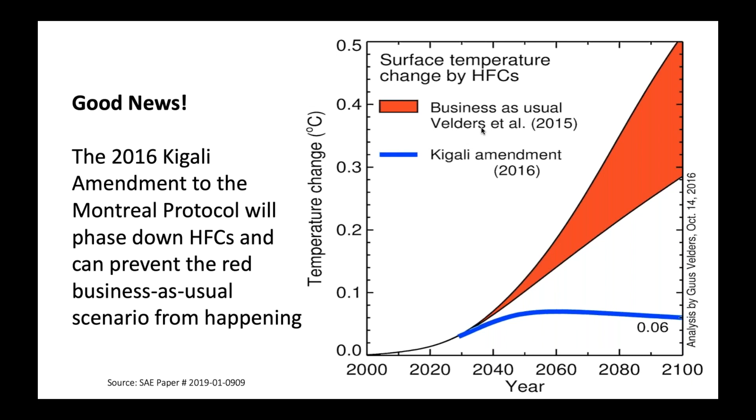So now you see the Velders base slide showing how the phase down of HFCs will reduce potential climate change by 2100.

Yes. Okay. Okay. So can I move on to this slide?

The next slide is okay. The next slide is the not so good news: low GWP MAC refrigerants are used in only a fraction of vehicles sold globally, the low GWP MAC refrigerants being primarily HFO1234YF or carbon dioxide. The solutions are needed for growing and emerging markets, especially in Asia and particularly in China and India, where the population is growing rapidly and standards of living are increasing rapidly.

So this chart shows that since 2013, there's a total of about 500 million vehicles on the road with mobile air conditioning using HFO 1234YF. Excuse me. Over 500 million vehicles on the road, period, with mobile AC since HFO 1234YF was introduced. The amount of cars using HFO 1234YF is only 65 to 85 million, according to Chemours, one of the major suppliers. So many of the cars on the road are still using HFC 134A.

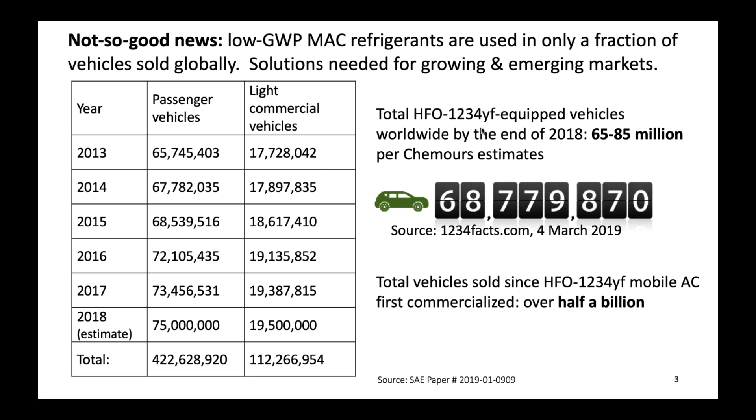So what is a secondary loop MAC system? The image on the left, is everybody seeing this slide with the image of the two systems? Yes, we are. Yes, okay. The image on the left is the direct expansion system, which is used in most mobile air conditioners right now. And the image on the right is the secondary loop system. And you can see that the image on the right has a piping loop in green, and that's where the refrigerant would go.

In the direct expansion system on the left, the refrigerant moves throughout those purple tubes, which means that they actually enter the passenger compartment. In the secondary loop system, the purple tubes carry coolant, which is non-flammable and can enter the passenger compartment without any risk to the passengers. So it also means that really any refrigerant can be used in a secondary loop system because the refrigerant stays only in the engine compartment. The secondary loop system also uses fewer fittings and shorter refrigerant hoses, so there's less chance of emissions of refrigerant.

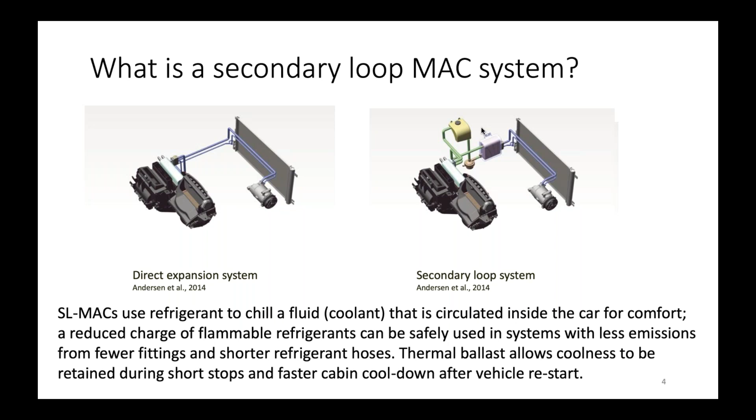One of the key features about the secondary loop system is that you can see there's a purple tank in the image on the right, and that holds the coolant. And that's called thermal ballast because it retains coolness even when a vehicle stops for a short period of time. So for example, if someone is making deliveries or stopping for a quick errand, when they get back into the vehicle, it will cool down much faster than in a direct expansion system. Or if you have a stop-start vehicle, it will save fuel because the car won't have to turn on while the vehicle is stopped in order to run the compressor to keep the vehicle cool. So it's an efficiency savings and a fuel emission savings.

Our demonstration used a Tata Aria 2.2 liter Dicor vehicle. It's a small utility vehicle that's shown on the right. And our goal was to show that the SL-MAC system can reduce refrigerant emissions and maximize energy efficiency by using improved powertrain control logic. And the powertrain control logic is just the software that allows the powertrain and the air conditioning system to communicate. So it tells the air conditioning system when to turn on, when the compressor should turn on. So for example, the compressor can turn off when the vehicle is accelerating or going up a hill, which saves energy, and then it can turn back on to cool down the vehicle when the car is slowing down or going down a hill.

So by maximizing that powertrain control logic, we get what's called enhanced air conditioning, and it takes maximum advantage of the motion of the vehicle to minimize fuel emissions and increase energy efficiency. Our partners, as has been said, are MAHLE, Tata Motors Limited, and IGSD, and dozens of collaborators and advisors. The refrigerants tested were HFC152A with a global warming potential of 138, and HFO1234YF with a global warming potential less than 1 in an SL-MAC system versus HFC134A with a global warming potential of 1300 and HFO1234YF in a direct expansion system. And of course, we are very, very grateful, as said before, for funding from the CCAC.

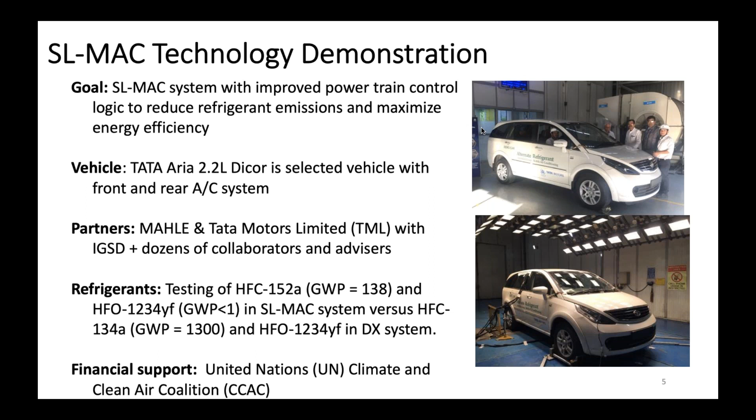Okay, so this slide shows our core SLMAC demonstration team and advisors. Most of these were directly involved in the project. From TML, the lead was Sangeet Kapoor with Prasanna Nagarhali, and Jagbendra Meena was the lead engineer. From MAHLE, Timothy Craig was the lead, and Lindsay Lietzel and Dr. Saurav Chaudhuri were the engineers. Jim Baker was our consultant, and IGSD, we were led by Dr. Stephen Anderson and Melinda Soffer, and I participated with Kristen Taddonio.

We also have this long list of advisors from Ford, GM, California Air Resources Board, universities, NRDC, a wide list of advisors and experts to help guide us along the way. And it wasn't just building the vehicle, it was also developing new standards with the Society of Automotive Engineers, doing a risk assessment update, doing a life cycle climate performance analysis, and just a very, very broad, comprehensive project.

So why are secondary loop MAC systems needed? As most of you know, HFC-134a is being phased out because of the Kigali Amendment. 1234yf is expensive, it's covered by patents. It risks recharge substitution with HFC-134a because of the high cost.

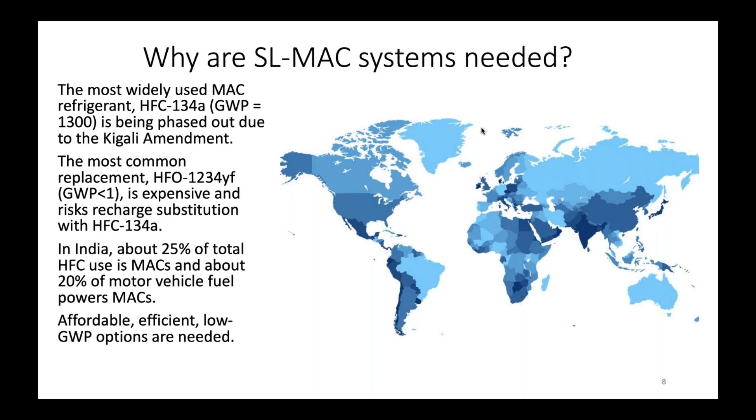And in India, where our project was based, about 25% of total HFC use is with MAC, and about 20% of the motor vehicle fuel used powers MAC. So HFCs are a very substantial factor in climate in India, and affordable, efficient, low GWP options are needed.

So why not direct expansion with a low GWP refrigerant? Direct expansion limits your refrigerant choice. It has to be 134a, 1234yf, or carbon dioxide. 134a is being phased down, 1234yf is expensive, and CO2, which many are interested in, has very expensive components, has performance concerns at high ambient temperatures. So it's used in very, very limited areas right now, in very limited markets.

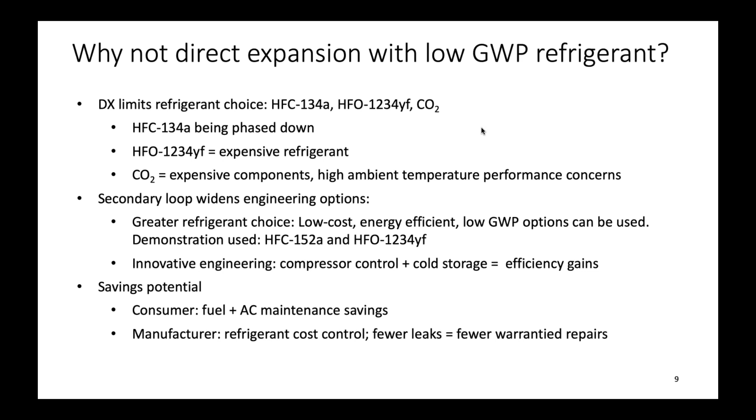Secondary loop widens the engineering options, many more and several more choices. We understand hydrocarbons are possibly being tested in secondary loop systems in the international market. And it allows for innovative engineering to maximize energy efficiency through use of the powertrain control system. And there's also savings potential for the consumer with fuel and air conditioning maintenance savings, and the manufacturer savings through refrigerant cost control, fewer leaks, fewer repairs under warranty.

So a secondary loop system provides advantages with an R134a system, 1234yf, or 152a. All of these, you have fewer fittings and shorter hoses for lower leak rates, higher reliability and lower service cost. You have this capacity for cold storage and a quicker cool down after a quick stop, a smaller refrigerant charge. You have manufacturing savings versus a direct expansion 1234yf system in a car with two cooling points, front and back. There's less air conditioning system noise and vibration because of the shorter hoses and the fewer connections.

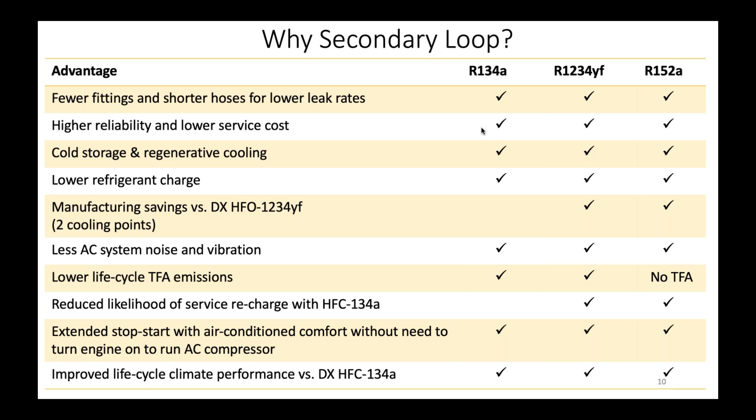There's lower life cycle TFA emissions, that's trifluoroacetic acid. It occurs in the environment, very small emissions with 1234yf, but 152a has no TFA emissions. There's a reduced likelihood of service recharge with 134a, extended stop-start, and improved life cycle climate performance versus direct expansion 134a systems.

We included 152a in the test because it's more affordable, it works at a lower pressure, so it has higher efficiency at high ambient temperature. There's more than a 95% reduction in direct refrigerant emissions impact due to the reduced charge and lower GWP, has good life cycle climate performance, no TFA, and importantly, it satisfies the US EPA Significant New Alternatives Policy, or SNAP, and the EU F-gas Directive, which requires the GWP less than 150.

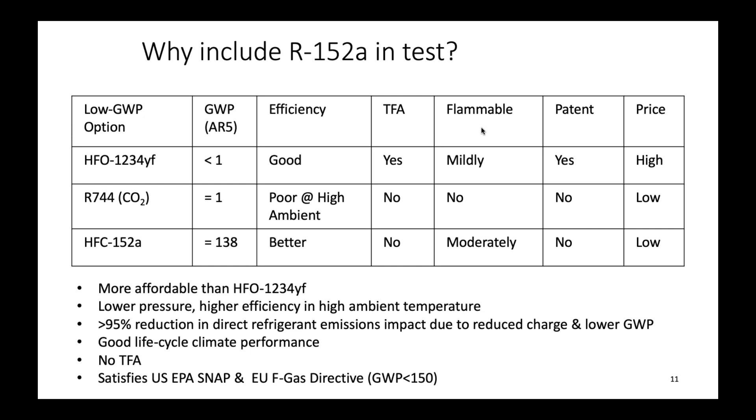So now I'll turn it over to Tim Craig and Dr. Chowdhury to talk about the system and some of the technical aspects of the secondary loop MAC program.

Okay, thank you, Nancy. Can you hear me all right? I certainly can. Okay, good.

Well, this is Tim Craig, and I appreciate the opportunity to give an update to those on the line relative to the technical aspects of this project. I'll give a quick introduction, and then Saurabh Chowdhury, who is the principal investigator, will go through the technical details. So first, in addition, let me thank the other members of the project, certainly IGSD and also CCAC for funding this activity.

I wanted to give a bit of perspective on this system relative to the applicability of secondary loop technology in the automotive environment. Because we are a supplier, we work very closely with the OEMs, and we look at various aspects of technology and the opportunity for an OEM to adopt that technology. In addition, secondary loop, when you look at it from multiple aspects that would be of a customer concern, it's applicable. First of all, if you think about complexity, although there are some additional components added, the relative level of complexity of a secondary loop is in what I would call the simple category relative to automotive technologies that can be implemented.

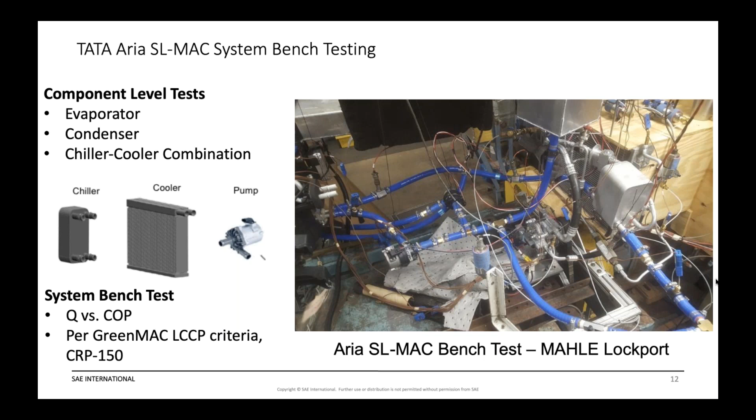Nancy, can you please move to the next slide, 13?

Okay, this shows the schematic of the test setup. The refrigeration system is shown on the top part of the sketch, which has a compressor which compresses the refrigerant and feeds into the condenser, which is shown by the orange rectangle. The condenser condenses the refrigerant, passes it to a TXV or an expansion valve, and that expands the refrigerant into a chiller. The chiller has another stream running through it, which is shown by the blue lines at the bottom part of the sketch.

That is the coolant loop. The coolant goes through the chiller. The refrigerant on the other side cools the coolant, and the cold coolant is fed to two coolers. There are two coolers because the system on the Aria has a front evaporator and a rear evaporator. The front evaporator is for the front driver and passenger climate control, and the rear evaporator is for the second and third row seats. So the coolant is fed to the coolers in those two locations. There is a reservoir which can accumulate the amount of coolant which is chilled by the chiller, and it can dispense it based on the requirement of the vehicle.

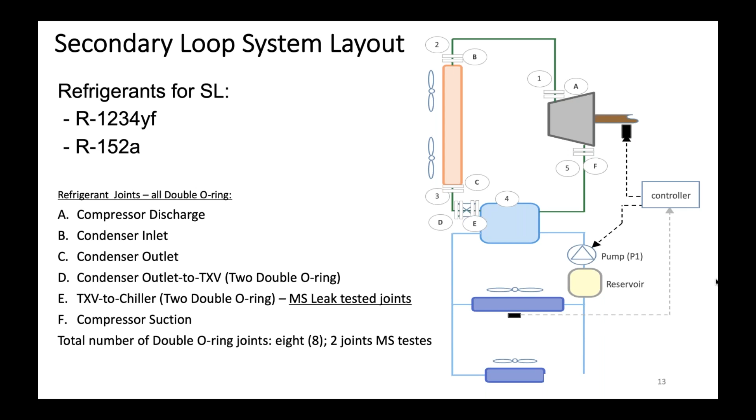Can we please have slide 14? In slide 14, we see the two comparisons. One on the right is according to the SAE J2727 standard. We have done calculations to show the baseline Aria system, direct system, versus the SLMAC Aria system, what

the difference is in R134A emissions in grams of refrigerant per year of usage. We have done this calculation with the assumption that the compressor has a single lip seal versus a double lip seal. So on the left column, you have 1 and 2 showing those two variants. The baseline versus SLMAC shows significant reduction, up to I think between 40 to 50% approximately reduction in refrigerant. This is just pure calculation based.

On the left-hand side, the blue table shows the actual test which is conducted according to SAE J2763 standard. There are two types of tests, one is a static test and one is a dynamic test. The difference is, in the static test, the refrigerant system is put into a chamber and we measure the amount of refrigerant gradually being leaked from the system into the chamber without the system being turned on.

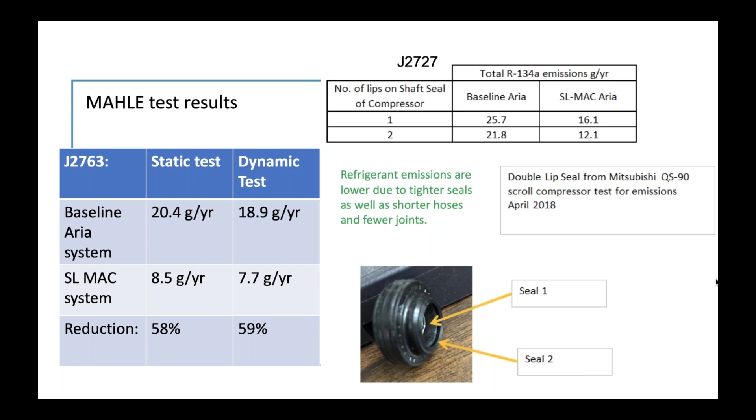So this chart summarizes the test results on the vehicle, which is performed first by MAHLE at our Lockport facility, and then the vehicle was transferred to Tata facility in Pune, India, and they performed these set of tests or measurements to assess how we are faring against the baseline vehicle. So of course we are using this low GWP refrigerant, which is one of the targets. By the way, the targets were set sometime in the early phase of the project after understanding the system behavior and the system requirements. Tata and MAHLE jointly set these targets

to ensure that the progress of the project is in the right direction. So we are, by using the 152A and 134A refrigerant, 1234yf refrigerants, we have met the GWP reduction target. In our system, because we have a very compact system, which is shown on the upper part of the sketch that I referred to a couple of slides before, we are reducing the amount of refrigerant significantly. The baseline vehicle came with 800 grams of 134A refrigerant, and we reduced the amount of refrigerant to approximately 430 grams, which is amounting to approximately 46%. Target of 40% is met.

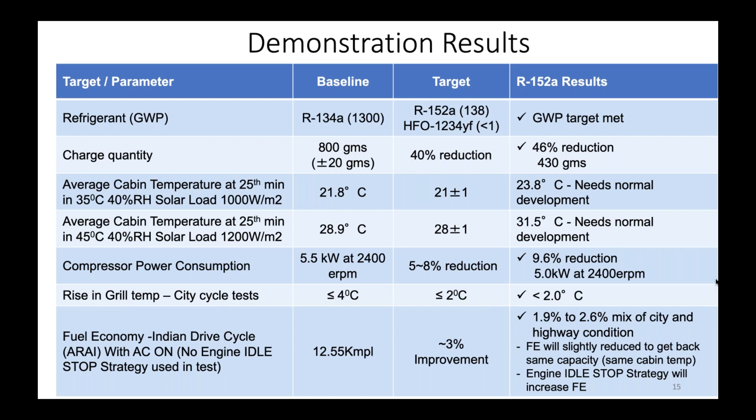So if you see the last bullet point in that lowest row, it says engine idle stop strategy will increase fuel economy. That is what we mean when we say that in a future vehicle, if we could implement this stopping of the engine during an idle condition or during a traffic stop, we would save even higher amount of energy. Nancy, kindly move to slide 16.

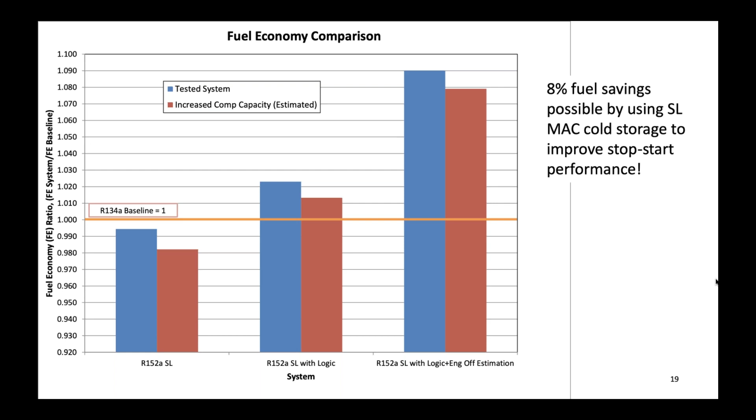In the next slide, we see the progression of how we get from our standard refrigerant 134A system, which we see right now in most vehicles, to a very low GHG emission. The first step shows if we enhance the current system, just improving, for example, the hoses and the joints and the compressor type, we get a significant benefit, 44%.

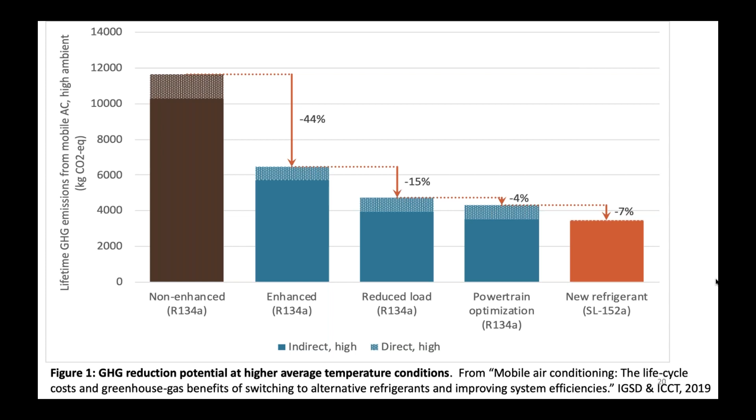Then, if we have this vehicle and improve it with proper insulation, proper kind of glass which reflects most of the heat, we will get an additional 15% benefit. Finally, if we implement start-stop logic, we get another 4% benefit approximately. And with the new refrigerant 152A introduced, which requires less power from the compressor, you get an additional 7%. So overall, we get approximately 70% benefit if we can walk through this process and implement it in all the vehicles.

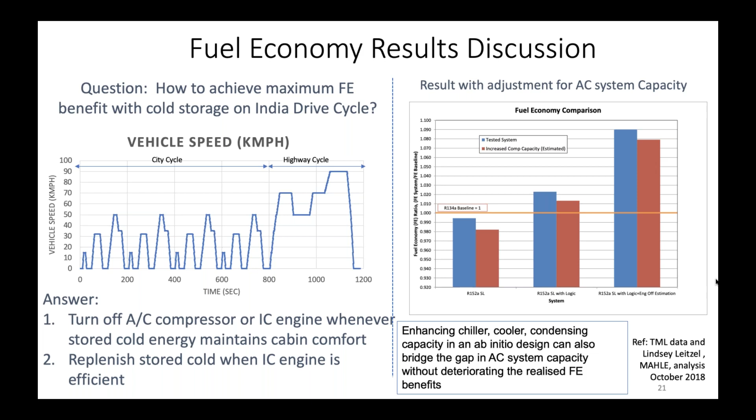This is a similar chart as discussed before. Here we show the Indian drive cycle. If you see, the first city phase has frequent stops and starts, and the vehicle speed is relatively low. In the highway cycle, we have high-speed driving. There are some decelerations and accelerations, but there is actually no stoppage of the vehicle in that phase. And we achieve the fuel economy, as I mentioned, with stopping the compressor as well as stopping the engine to conserve the fuel usage.

So this is overall what the project achieved. We reduced the amount of charge in the refrigerant system from about 800 to 430 grams, and we also improved the leakage by improving the joints and reducing the number of joints from about 37 to about 59%. And finally, as I mentioned, by walking through these different steps in technology improvement, we can reduce the total GHG emission by 95%.

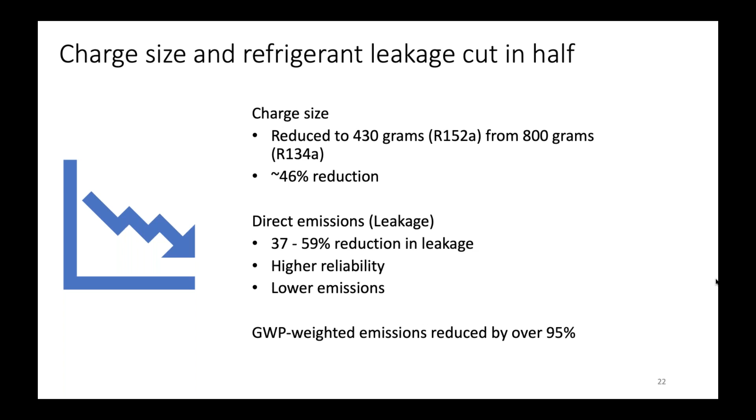Nancy, please take over this slide. Yes, so I'll take over, and the figures for these slides were produced and calculated by Kristen Taddonio, who I think is on the line. It shows the projected secondary loop manufacturing and ownership cost for India for a 2 cooling point system, cost and savings in US dollars.

So in terms of the refrigerant, the charge in a direct expansion system with 134A is 800 grams. With 1234YF, it's 750 grams. And for the secondary loop system, it's almost half at 430 grams. So the CO2 equivalent tons for the initial charge is 1.04 for 134A, but less than 0.01 for 1234YF and less than 0.1 for 152A.

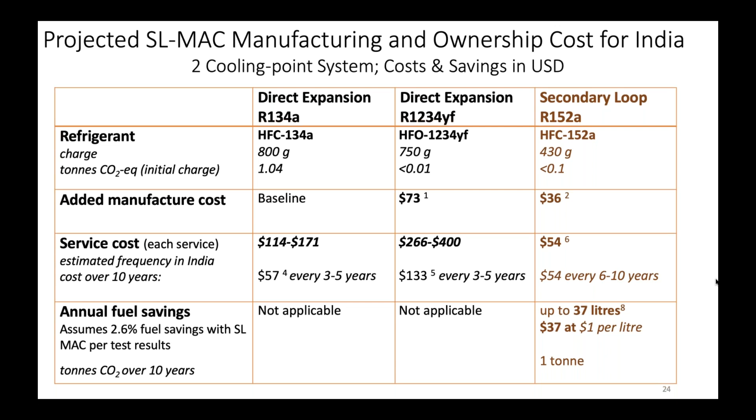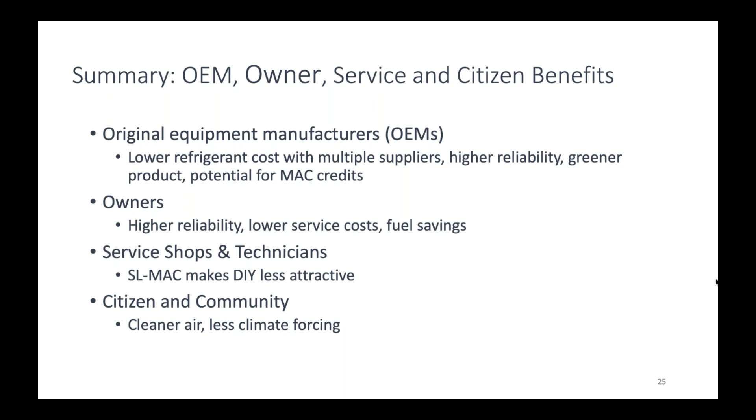So in summary, there are original equipment manufacturer savings, owner savings, service, and citizen benefits. For OEMs, there's a lower refrigerant cost with multiple suppliers, higher reliability, it's a more environmentally responsible product, and has potential for MAC credits. For owners, there's higher reliability, lower service costs, and fuel savings. Service shops and technicians have the advantage that the secondary loop system makes do-it-yourself servicing less attractive. And for the community, it's cleaner air and less climate forcing.

So in terms of communications, the project has been widely publicized since its beginning in July 2016. There have been 14 papers and presentations by members of the team since July 2016. Audiences have been Montreal Protocol meetings, industry, and public audiences. In addition to the IGSD reports, there have been milestone reports submitted by MAHLE and Tata Motors according to schedule, including their very, very substantial final reports.

11 meetings and side events have been conducted or attended to present the project progress and the results. And there's been coverage in more than 20 mainstream and industry media as a result of the press releases and papers, including Reuters, Economic Times, and Automotive Engineering Magazine. And this slide just gives a portion, not entirely complete, because they don't fit, of the presentations and papers that have been given on the project, including a 2019 presentation at the SAE, Society of Automotive Engineers World Congress, just this past spring by Kristen and Tim.

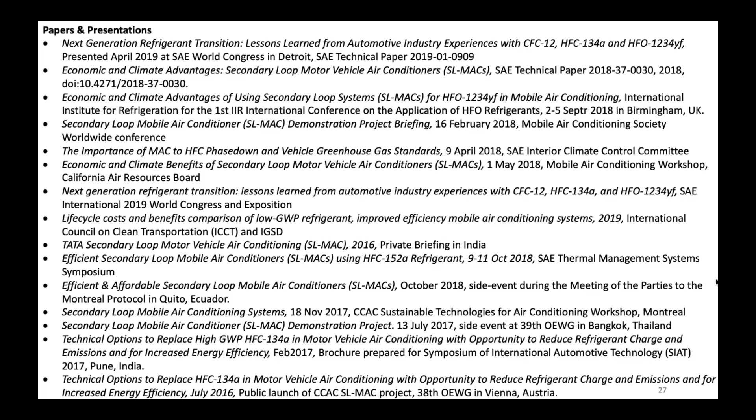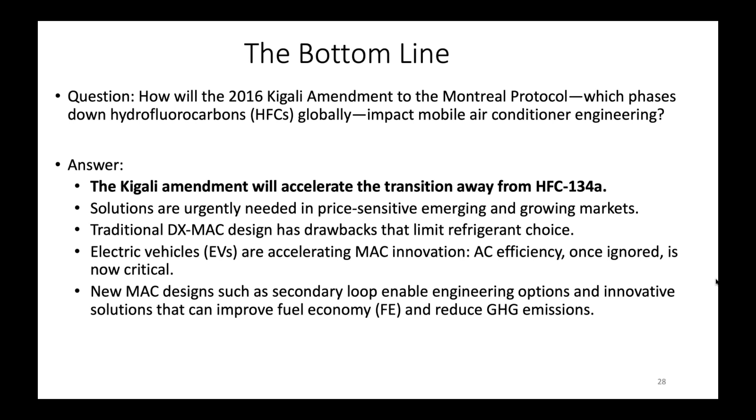So the bottom line question is, how will the Kigali Amendment affect mobile air conditioner engineering? And the answer is that the amendment will accelerate the transition away from 134A. Solutions are urgently needed in emerging and growing markets, which are very price sensitive. The traditional direct expansion design has drawbacks that limit refrigerant choices. Electric vehicles are accelerating MAC innovation, and new designs such as secondary loop engineering allow options and engineering solutions that can improve fuel economy and reduce greenhouse gas emissions.